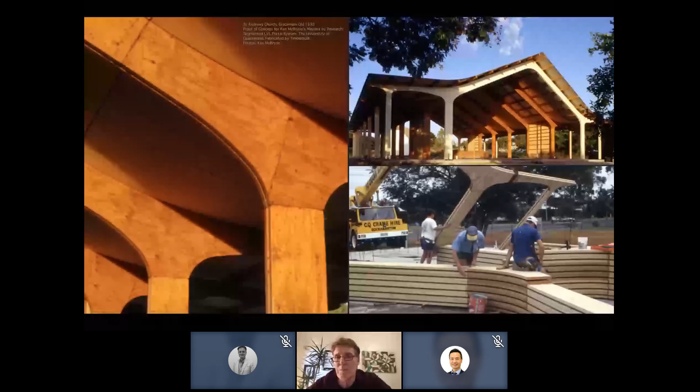Here's the first one. It's a community church near the country town where my mum still lives in central Queensland, built using the segmented LVL portal frame system for my master's research. The frames were fabricated in the south of Australia near Victoria and trucked to site in central Queensland. This LVL portal system, as you can see on the top right slide, allowed top-down construction. This let the unskilled volunteers, part of the church group, complete the project at their own pace, sheltered from hot tropical sun and intense rainfall that we get in Queensland. Now check out the opaque coatings around the perimeter of the building. We're going to talk about that a bit later.

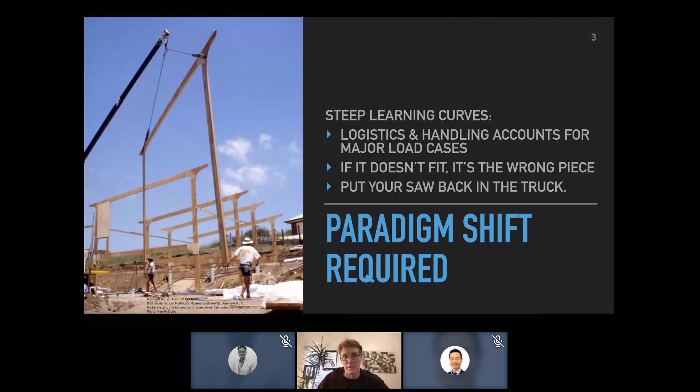This is the second pilot project. It was on a steep site in Brisbane and was a steep learning curve for all involved. As John has shown, there's a lot of practical things we need to consider. For example, logistics and handling account for major load cases. Look at these flimsy portal frames. They're very strong when they're in place, but when they're waving around in the truck and being lifted by builders, that's not the case. And the key thing here too is if it doesn't fit, it's probably the wrong piece. So guys, put your saw back in the truck, please.

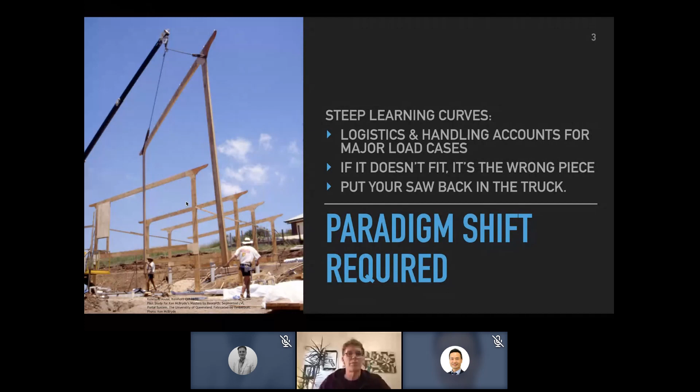That's reminding me to say there's a paradigm shift required on site. Also, I'd like you to see these, I think you can see my pointer, these flimsy temporary braces. Some of the most significant injuries on site are caused by temporary props. We'll see a better example of that in the next project.

But more importantly, the second project gave me deep insights into the cultural challenges we face introducing modern methods of construction. It caused me to think what it means to be a builder and reminded me of what I witnessed in my dad's life as a motorcycle mechanic. Remember, the uptake of efficiencies and systemization in the automotive industry is well ahead of construction.

So it was later in my dad's career as a motorcycle mechanic, he explained to me the lack of satisfaction that had come to him, because now he was being asked to be a parts replacer rather than someone who finds ways to fix and repair stuff. That was when I realized why he was into really old motorcycles, ones you cannot actually buy parts for. So there was no choice but for us to make these parts. And that is the deeply satisfying bit for a creative, trade-skilled person.

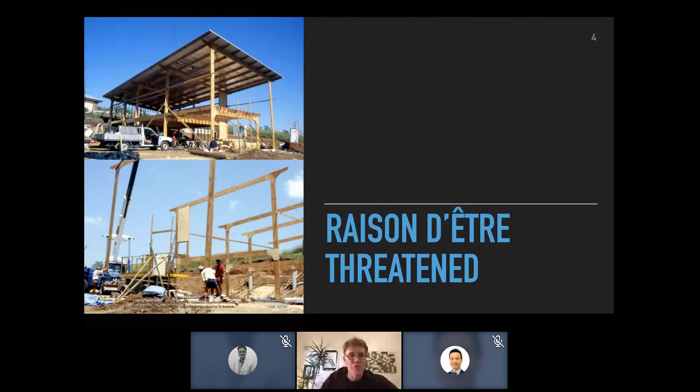So we're asking these teams of builders with generations of making and fixing in their blood, and large bodies of available codes and standards that they're very familiar with, to suddenly simply assemble things that had nothing to do with making. And I believe it's one of the challenges with DfMA: we are changing the raison d'etre of the industry that we're working with.

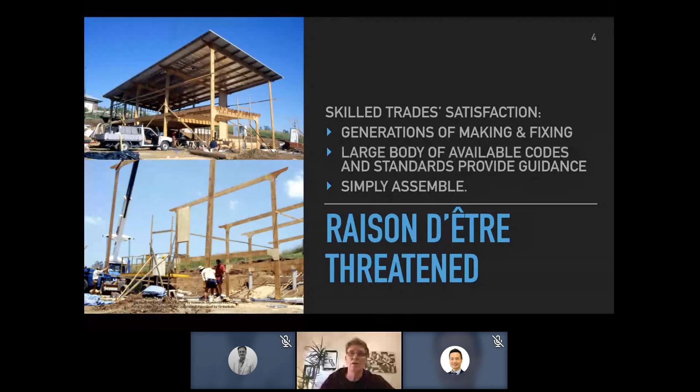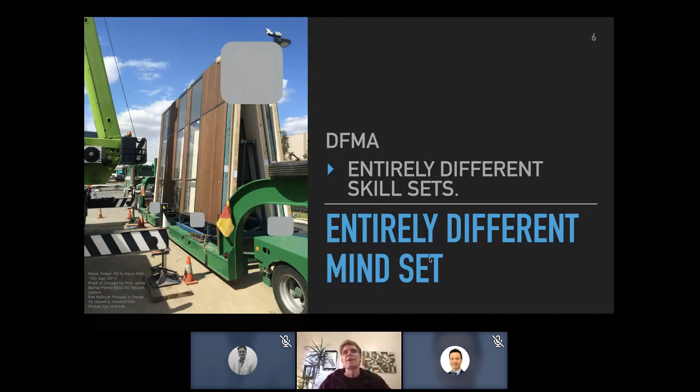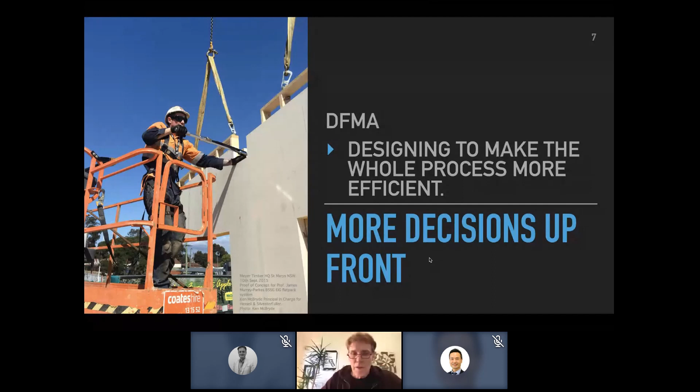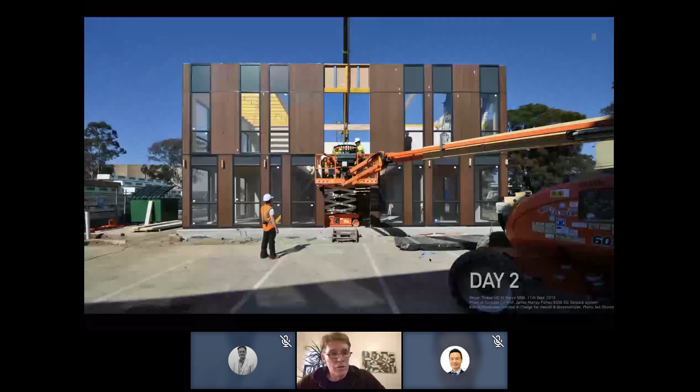It looks a bit funny because what we're actually doing is it's a proof of concept. So we were testing a whole lot of different facade modulation and different performance, so that residential and commercial are quite different acoustically and fire. But the cladding is very interesting. I'll talk about that a bit later. It's 100% natural, sustainable yield hardwood sawdust. It's carbon positive. It has less than 0 carbon footprint. It's called WeatherTex. We use it every time we can.

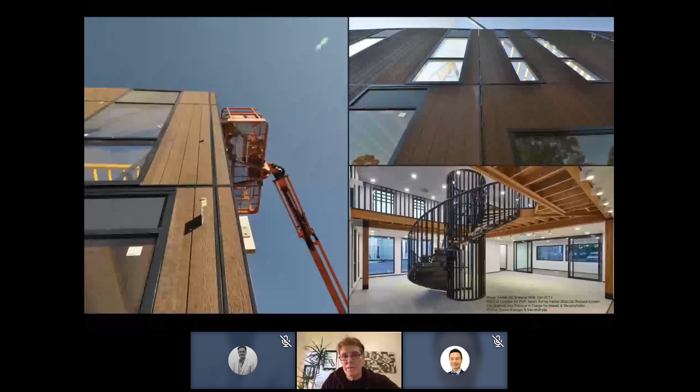But here's the thing. In the amount of time it took me to put this slideshow together, this 380 square meter building was put together faster than that. I'm pretty slow in PowerPoint, I guess.

Okay, this is an interesting project in St Vincent's Private Hospital, stage 2. I was talking to the builders Build Corp. We had designed these bathroom pods, 128 of them, to be prefabricated, as you can imagine. Build Corp couldn't find any pod manufacturers who could do a cantilevered structural pod. So they set themselves up their own off-site manufacturing facility and they confirmed they would do it again. Very successful.

What you see here is one of numerous massive ventilation facilities for Sydney's extensive WestConnex motorway tunnels. To give you some scale, this vent stack is 30 metres high. I want you to notice these bands in the anodized aluminium. I'm going to talk about that later. But the remarkable thing about this project is what you see above ground is the tip of the iceberg, literally. Underneath are massive facilities of fans and filtration and attenuators and all that.

So I had contemplated building these big vent stacks out of a lightweight material, CLT, and I'd also proposed this brick, thin, single-skin brick wall to be assembled robotically. Neither of these two initiatives were taken up by the contractors. My client were the D&C tenderers. So I think that's probably because in the industry there's not enough trusted resources for contractors to draw upon. In comes the handbook for design of modular construction. That's what it's for.

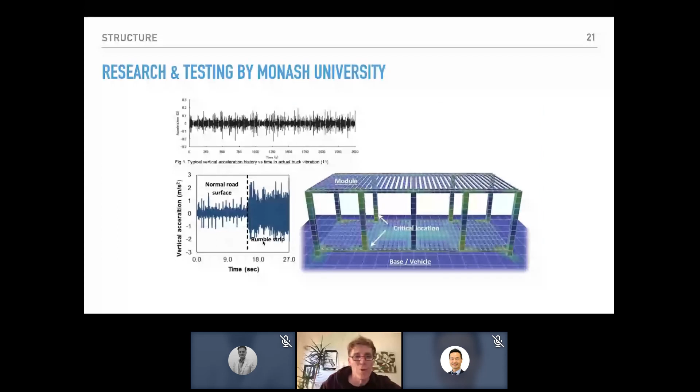Here's one looking at a volumetric module on the back of a simulated vehicle, and testing the different load cases, whether you're going over a normal road or a rumble strip, or let's say a judder bar if you're a Kiwi, a speed bump if you're an Aussie. But go to Dubai, the taxi drivers call them speed ramps. Too much fun. Monash University, again, PhDs looking at testing finite element analysis versus live experiments.

The next chapter is building services, and that's where a lot is going on in Australia. This is the Barangaroo Towers, developed and built by Lend-Lease. Here are A.G. Coombs' response to DfMA prefabricated service modules. Check out the size of these babies. Similarly, Fredon, working at the cutting edge of this area as well on Blacktown Hospital, in the factory, on the site.

Facades, John mentioned structural load bearing. This chapter deals with them as non-load bearing. We're back to St Mary's Meyer Timber headquarters. This is a facade panel fully glazed, primed and coming into place.

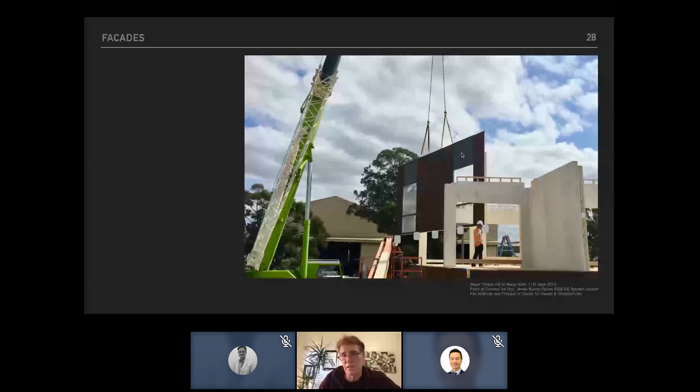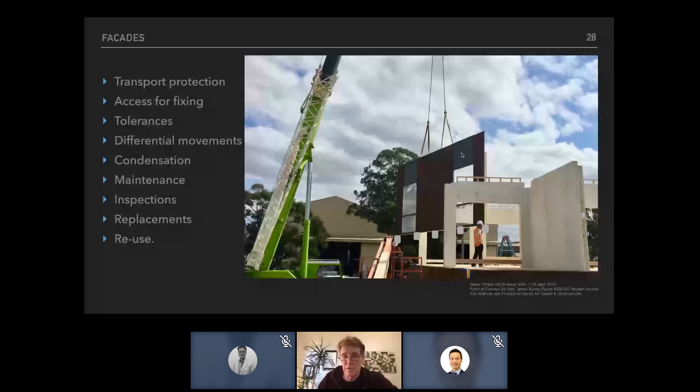The things we're thinking about here when it comes to architecture is protecting these finished products during transportation, access for fixing, how big is your hand, what spanner is required, tolerances, particularly between different materials, concrete has far grosser tolerances than timber and steel, differential movements, again, between those materials. Condensation is a biggie, depending on your climate. Maintenance, of course, inspections, replacements, and please think about reuse. We want design for manufacture, assembly and disassembly, please.

Architecture, rolling right along. Let's start with the legend himself, early adopter, Buckminster Fuller, the Wichita House, which was an evolution from his work starting in 1927. Look at that beautiful quote, maximum gain of advantage from minimal energy input. And more recently, co-author James Murray-Parkes talks to us a lot about, mouthful this one, more maths, less mass. Beautiful.

So when I think about prefabrication, especially if we're talking about different cultures, remote areas, we'll talk more about this in the next webinar, but Kenneth Frampton has taught us to think about place form. Here it is in Bucky's, the thing that comes from the site, versus product form, the thing that's imported. On Aurora Place, we were thinking about this too. Distance and location, probably not such an issue in Hong Kong, but it certainly is in Australia.

How far away is your project from a manufacturing hub? And indeed, how far are trade skills coming? If they're coming way too far, they're way too expensive, and that makes a big difference for offsite or prefab. Site access for the trucks and cranes. Weather and materials handling is a big deal.

When prefabricated elements are exposed to the weather and water or moisture is sitting in on a steel section, for example, and then it's closed up, in that interstitial space, we're getting degradation that we don't know is happening, and it's a common point of failure. Of course, if we're thinking about timber, then moisture is going to swell it, and the humidity will change the size of that and make it more difficult.

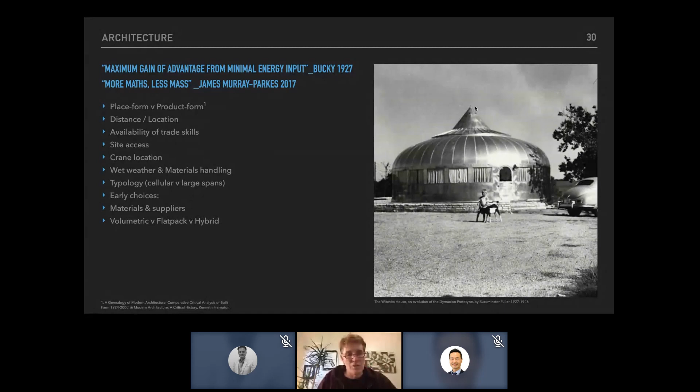We have to think about volumetric versus flat pack, or a hybrid combination, which John talked about, because of course volumetric, there's no substitute for speed. And for those who are not familiar with that definition, we're talking about, let's say, a hotel room or student accommodation that has the beds inside, the soap, everything ready to go, the salt and pepper if it's a hotel room, and that can just be piled up on site and done. No substitute for speed there.

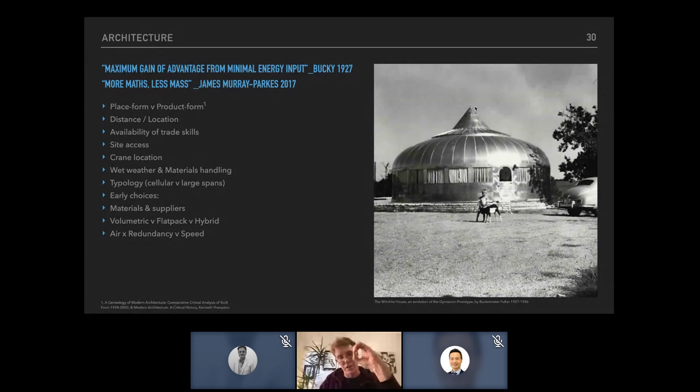But if you're taking that a long distance, you are transporting air. There's also structural redundancy, because that module has got to be strong, as we saw on the back of a shaking truck. And when we put them together, we get double structure. That's an extra cost that needs to be considered.

But of course, the speed issue reduces builders' preliminaries, which are a big part of a construction cost. Repetition versus the ability of parametric models to give the contractors repetition, fabricators repetition, but gives us designers the ability to introduce variation, or what we might call mass customization.

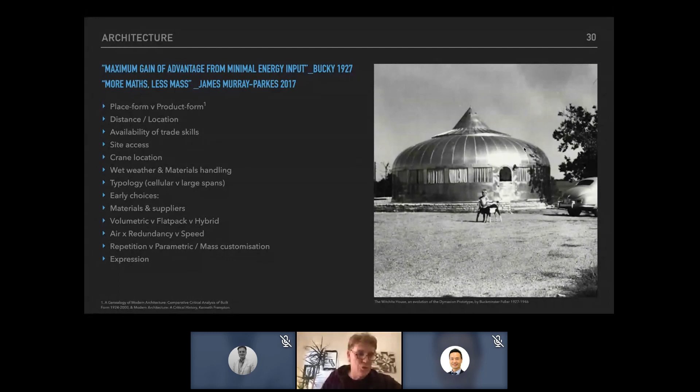The expression of the project is important to consider. Here, Bucky is enjoying showing us the radial nature of how this building was assembled. It came in a tube, by the way, a stainless steel tube. And of course, reuse, please. I'll keep banging on about that.

Materials and manufacturing. Let's look at the D1 tower, 80 stories tall in Dubai, to prompt a few issues around materials and manufacturing. We designed at Innovarchi a timber shade canopy at the base as a transition element between indoor and out. And what we're looking for here is optimization of quality. Our client was happy to go with Hess, because we hit their client's budget, because we worked very closely with Hess from day one, and we worked very closely with Knippers Helbig, their favourite engineers.

So this canopy was not just a whim by the architects, it's the result of a very close collaboration and an evolution of design based on their ability and minimization of waste using their off-the-shelf methodologies and joints versus inventing new ones. We're thinking about lifting and location aids, which I mentioned before. Handling is an important thing for us to think about when we're specifying, particularly glass and metal. We don't want sharp edges. Wet weather protection, I've already mentioned.

So John mentioned collaboration and early understanding. Please, one of the main challenges in our industry, I think, is absence of communication and understanding of each other's skills. So go and talk to your contractors early. That's what we need to do in DfMA. It's like back in the day. Go and talk to them, learn from them. There's no substitute for seeing what they can do.

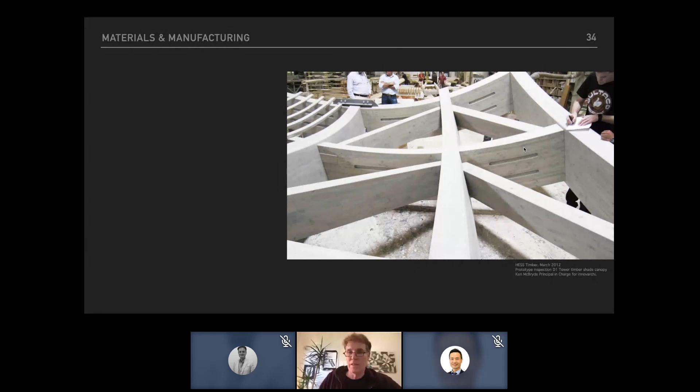You must understand the tolerances they can achieve. You need to understand the accuracy they can achieve, which is, if you specify a size, how close will they get to that? And then there's precision. How close will they get to that on a repeated basis? They are two things you need to understand. There's no substitute for going to have a look. This canopy evolved significantly after visiting their factory several times.

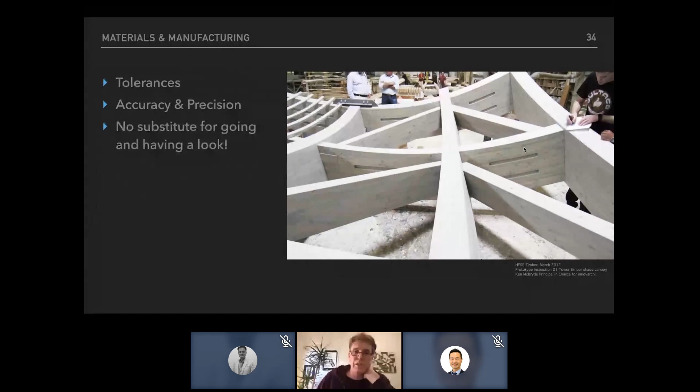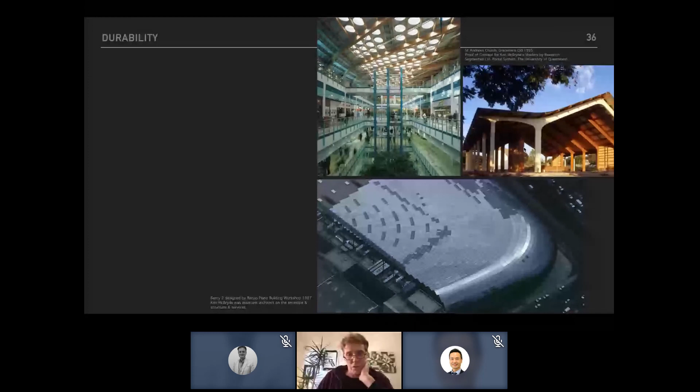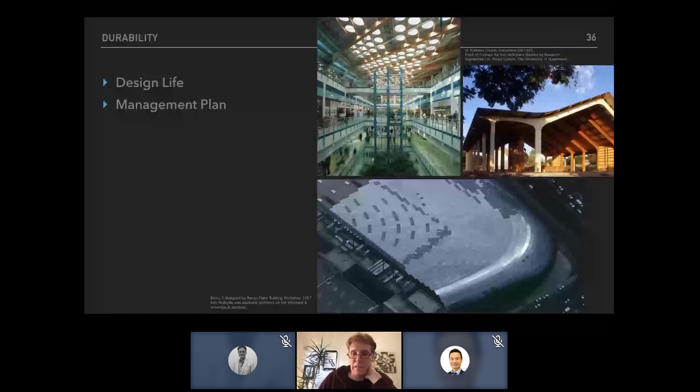Durability. Here's a cracker project, Renzo Piano Building Workshop. That's the one I walked in and got a job with, Bercy 2. Wow, what a blast. But we have to start with the issue of design life. We need to understand the management plan around durability and maintenance and the exposure of that project to the elements.

In this case, Bercy 2 looks like this kind of tough shell on the outside because it is flanking the periphery, this massive 24/7 freeway, and it is adjacent to the train station, a TGV, train à grande vitesse. They come in at high speed, jam on their brakes and spew out brake dust. Conventional architecture didn't cut the mustard, which is why Renzo got this job. But of course, we were looking for a soft inside: tough outside, soft inside.

So exposure to humidity was a topic on this project, because these arching glulam beams, which run diagonally across this building, and they're all identical in geometry, step from inside to outside. That change in humidity of that timber has not performed well, a learning for us.

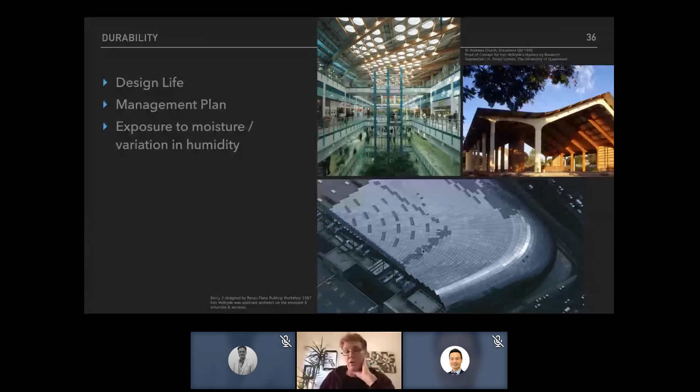And back on the Gracemere Church, exposure to UV. In Queensland, we have to take that seriously. So the approach here was a bit like when we go to the beach. We've put the equivalent of zinc cream, an opaque, light-coloured, reflective coating on the bits that get exposed to sun, like our nose at the beach.

And exposure to insect and fungal attack is a big one with timber. You can't quite see it here, but in Australia, we put a 250mm minimum smooth concrete distance between the dirt, where the termites come, and the timber. It allows us to monitor that, and mesh underneath it, of course, too. Sorry, I just hit the wrong button.

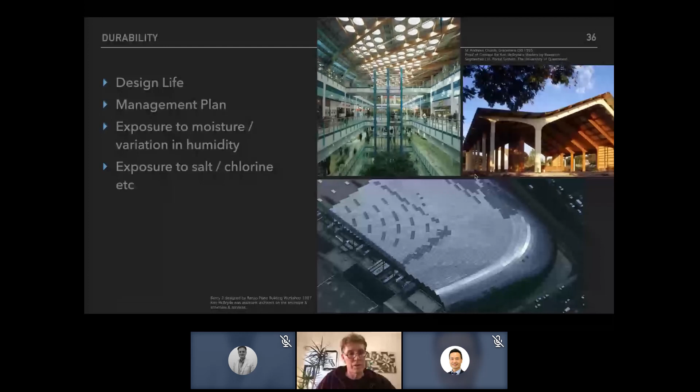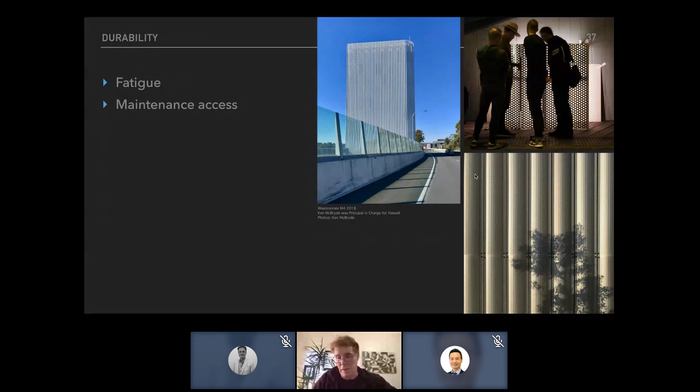Maintenance access: this skin, this veil, is a metre or so off the concrete to allow for maintenance and access to inspect the elements, not only the lights that are behind, but also the equipment that the freeway operators use to test the air quality.

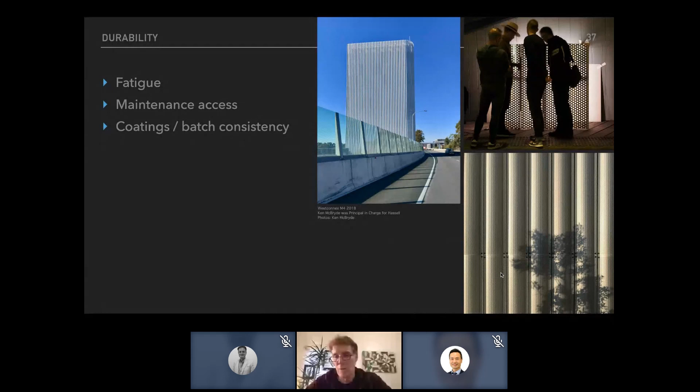Coatings and batch consistency I raised in the previous vent stack. You saw the big bands. Here you can see them just on the edge, I think. It's a particular issue with anodizing. These little holes here are designed so we can easily replace the panels that are close to ground. Now, when we do that, we have to accept we will get a different result with clear anodizing. Even as you saw, when it's all supplied at once, we get different situations.

Now, because we knew that would happen, what we designed is different hole sizes, which is like a dot pattern of grayness, which gave us another game to play with that tonality. The smaller holes, it's an issue of safety as well. We didn't want people to be able to climb this vent stack or indeed get their fingers stuck in the holes. So the holes are very fine, close to the ground. But there's no substitute for testing at scale 1:1. That's what's going on here.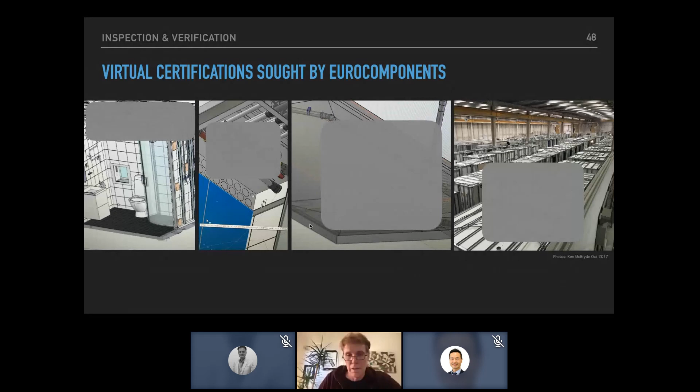Inspection and verification. If you haven't seen this Four Corners program, ABC TV, from August last year, it's worth a look. It'll give you an insight into what's going wrong in terms of inspections and verification. My friends, Eurocomponents in Italy, probably global leaders in bathroom pods, they believe that the bottleneck in certification would be relieved by inspecting their Revit model, their digital twin. Their point is, once the pod is built, it's very difficult to inspect the plumbing and the stuff that's in the concrete or in the walls. So please, certify our BIM model and away we go. What a good idea.

Traceability is of major importance if you are talking about innovation. Aurora Place, designed by Renzo Piano, was the first building in the city of Sydney to use structural silicone glazing. That is not captive with aluminium. Aluminium is a nasty product. We didn't want to use it. Plus, we want a smooth facade. So the only way we could get that through was tracing every single step of the manufacture of these facade panels and monitoring them to this day. 20 years later, there are panels on the roof that are inspected and exposed to sunlight, and the building maintenance team, the cleaning people, are trained to spot any early signs of failure, and in go the clips to hold it on. The traceability allows us to know exactly which panels might be affected by that failure.

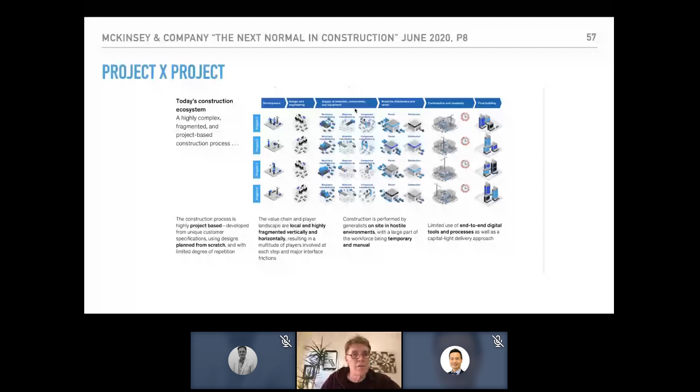Documentation is a big one. We're all familiar with that. It's all about BIM. Check out that for some guidance. If you're not familiar with recyclability, please check out Cradle to Cradle. There are a couple of other chapters later in the book, little ones, on low rise, on relocatable, on digital engineering and lean manufacturing. Worth a read is the McKinsey & Company, The Next Normal in Construction, which was released just a few days ago, an easy read. It talks about lean manufacturing. Check it out.

But you know what? I think everyone's pretty aware of the fact that we are responsible for nearly half, let's say 30 to 40% of the impact on climate as listed here. I'm whipping through to try and save time. So we have an obligation as an industry to improve our game. I'm very interested in gender equality. I think DfMA helps that. If you're going to work in the same place every day, it's easier to organise childcare. You're not driving all over town with a ute.

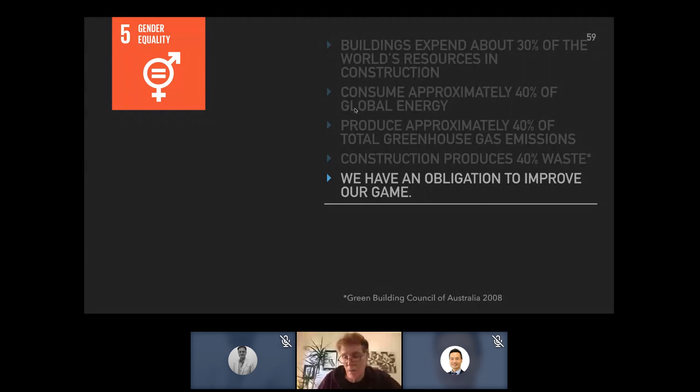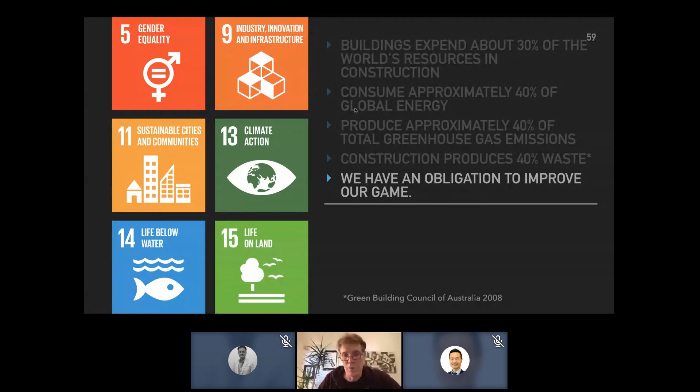These are the UN global goals that float my boat, excuse the pun. Check them out, see which ones you like, and get on board. We can do this, guys, if we work together. We're a big industry. There's 1,000 people here. Let's agree. Grab a hold of this handbook. If DfMA is the next normal, this will be your best friend. It's appealing to read. It's easy to use in real life situations, and it's the only guide of its kind that we know of in the world. So use this to make your difference.

But please note, it's an evolving document. It's now being adopted as an Australian code. The Canadians are using it. I wonder who's next. Hong Kong, here we come. Ha. So download it here, guys. It's free. It's easy. It's a beautiful PDF.